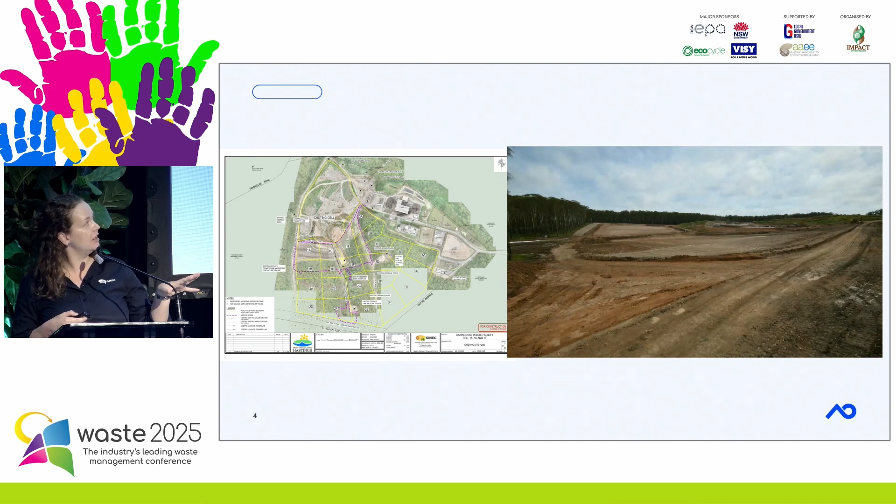It's a snazzy time lapse of the whole thing being constructed, and that's something else that we would definitely recommend for these construction projects. It's just a proprietary product. We don't sell it, but we have lots of clients that use them. It takes a photo every 10 minutes, and you can tell the contractors that it's so you can make a pretty time lapse for your presentations, but honestly it's just useful to be able to keep an eye on what's going on every day. And we were able to monitor our construction projects all across the country somewhat remotely. So yeah, you can see Cairncross being constructed there.

You'll be coming across, there's a lovely flyover at the end that shows the stormwater separation bunds, which are there to minimise leachate generation.

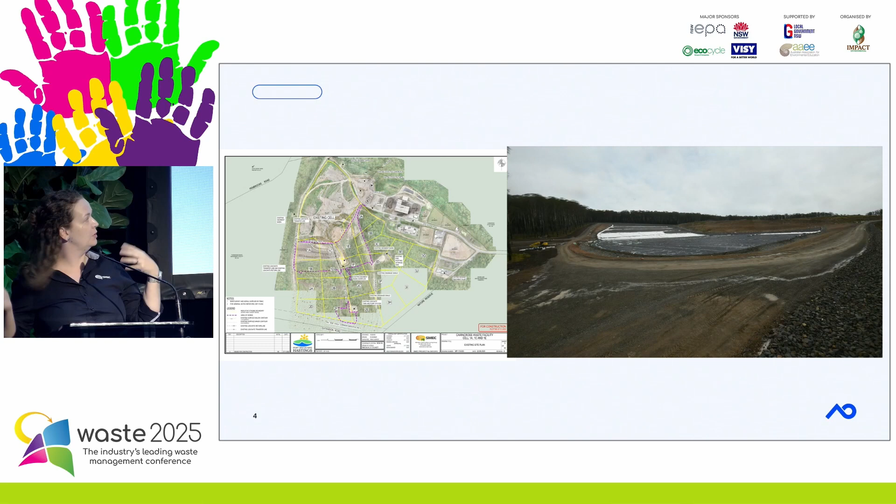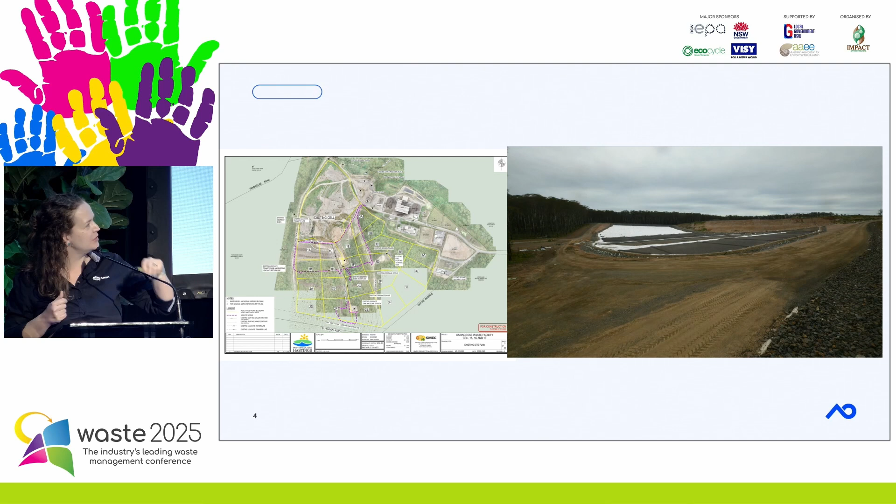So I'm going to jump ahead. We don't need to watch all of Cairncross being built. Go watch it, it's on my LinkedIn. You can see the stormwater separation bunds. We're very proud of that one. Oh, there they were. Terrific. All right. On to closure.

Water flows downhill. Water management is a key principle of landfills. Everyone likes to think landfills are about garbage, or sometimes my geotechnical colleagues tell me they're geotechnical problems. The majority of the significant issues that we see at landfills are water-based. A quick primer, we've got a broad church in the room, as we always do in landfill presentations.

We have 3 water streams. We have leachate, which is dirty garbage juice, water that's touched waste. We have sediment-laden water, which is water that's run off day cover, so it's picked up sediment soils, looks like a chocolate milkshake. And you have clean water, which is storm water, which is run off the grass.

When you're planning your site, obviously you've got high sides, you've got low sides. I spent 5 years at university to be appropriately qualified to tell you that water will flow downhill. You need space at the bottom of the hill for your leachate and sediment dams. Obviously you understand the operations of your site. Of the 3 water streams, sediment is the most relevant to capping. We'll go there in a second, but I left myself a note.

I'm not talking about leachate today, but the other question that everyone comes to ask me is, is my leachate pond big enough? And I will say, it depends. How much leachate do you make? And then you will say, I don't know. So it's tricky. Go get some flow monitoring. That helps everybody. Back to capping.

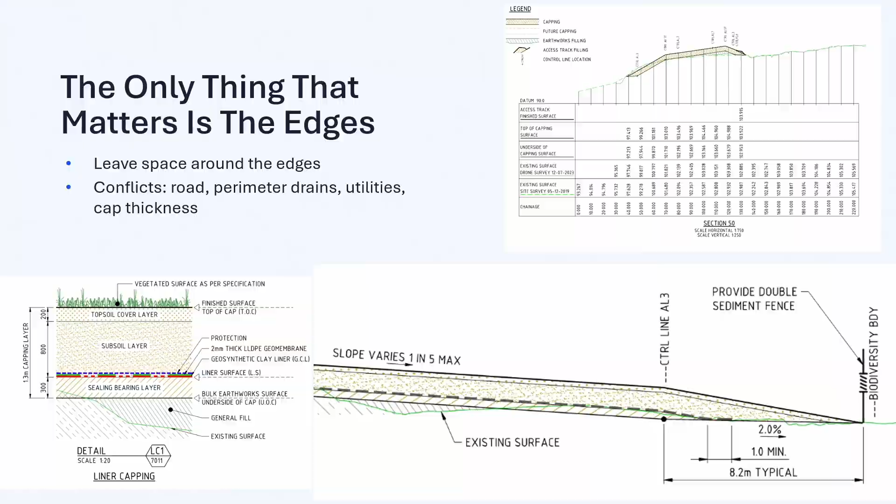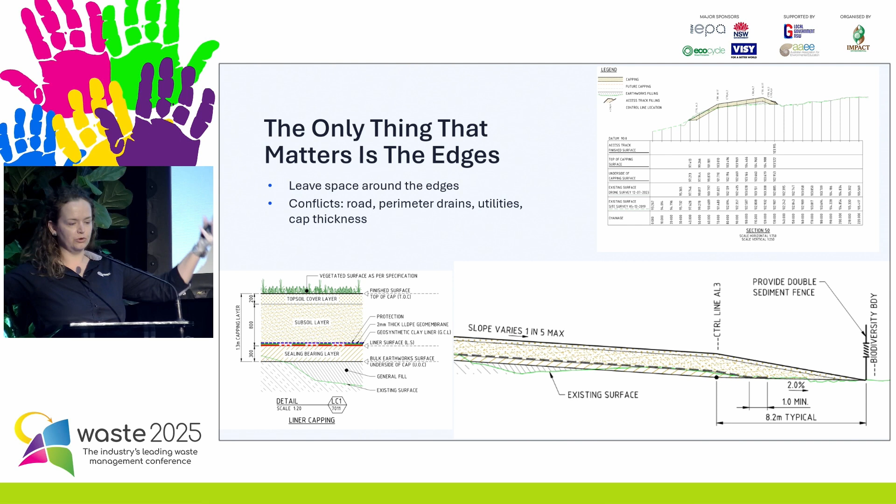So this detail, there we go, is a standard cap, 2016 cap with geosynthetics. That's New South Wales terminology that's sort of similar all across the world and Australia. That detail there is like 90% of the work, right? Put down some dirt, put down some low permeability, more dirt, more grass, off you go.

The trick is what happens at the edges. The edges are constrained, so we need to think about your fence. We need to think about where your property boundaries are. We need to squeeze in access tracks around the outside for monitoring and other uses. And we need to think about the drainage infrastructure, the open swales that we were discussing before for our water, which is flowing downhill. The cap also takes some room.

So over here you can see the problem is we actually folded that guy down because we ran out of room. But the cap itself takes some room at the edge. So the key message is here that your waste can really only go to there. So if you're placing waste, don't put it all the way to the fence, okay? Give yourself a margin at the edge.

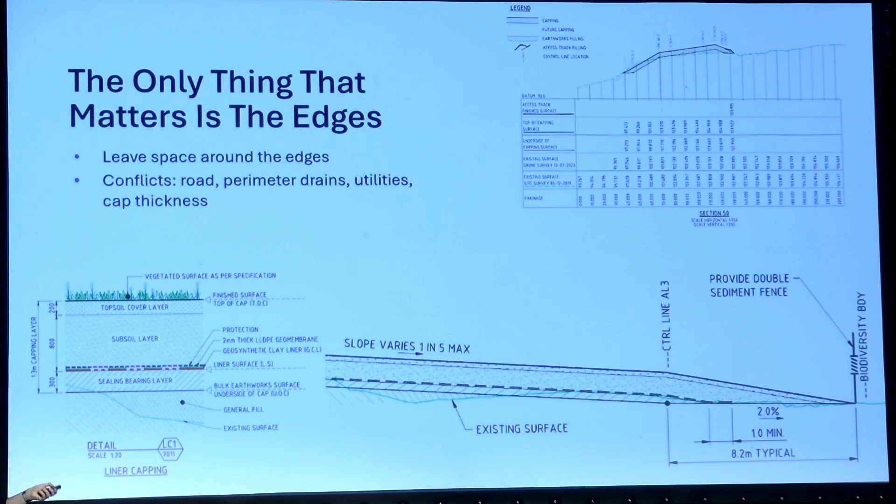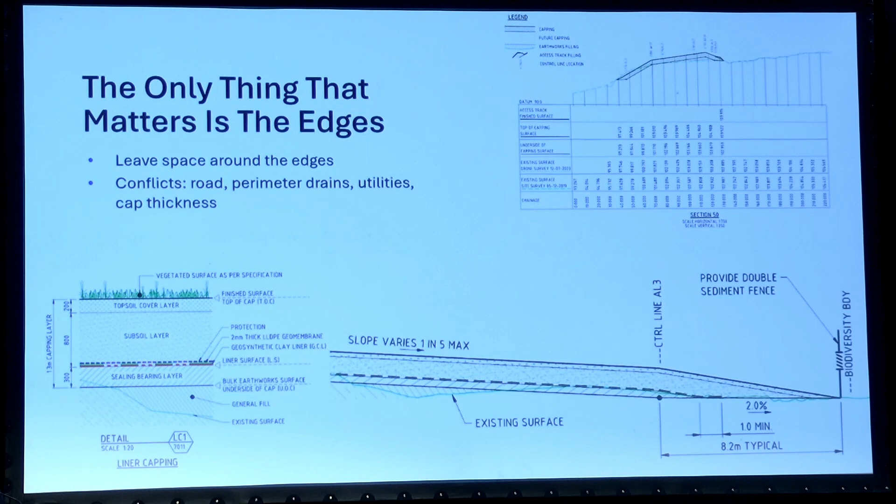Space makes everything easier. If you're tight to the edges, get a proper cadastral survey. Most surveys don't include a full boundary definition. It's a little bit more expensive than a normal one, not anything outrageous, but it's just more than normal. It's not normally needed.

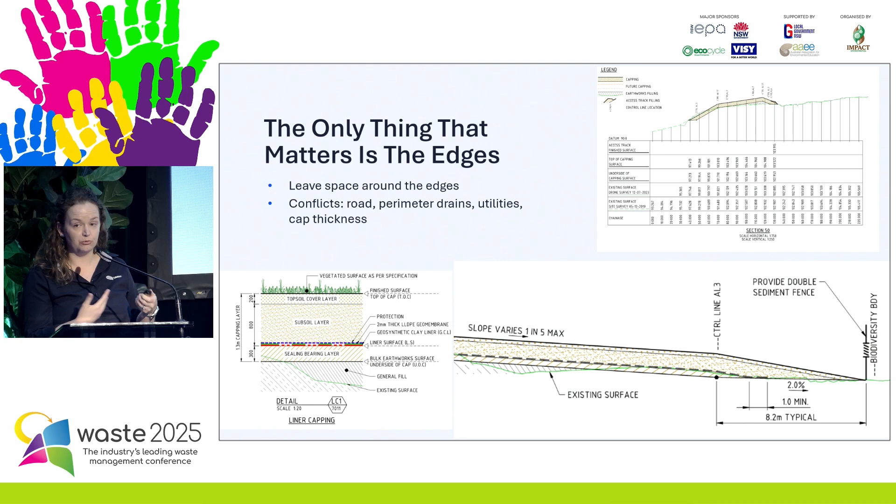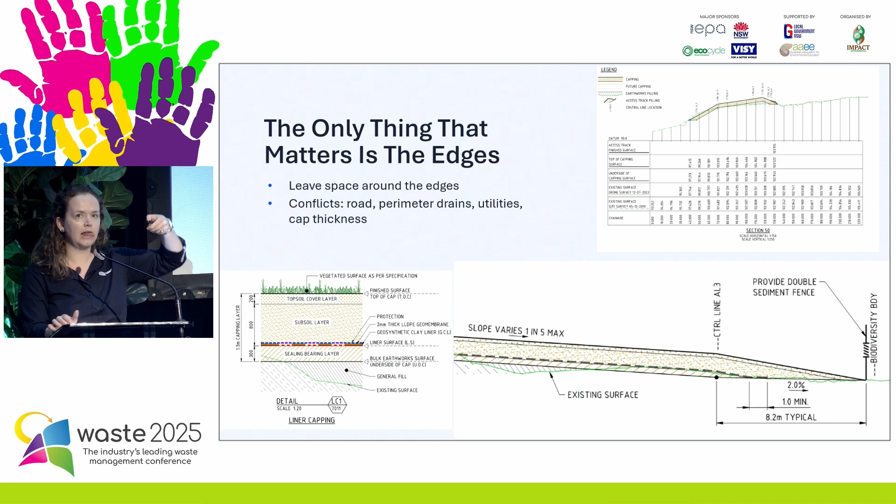The database extracts, I would say, are normally within 1 or 2 metres accurate, but I've seen some rural ones that are up to 7 metres out. So if you're getting jammed at the edges, you're doing work at the edges, work out where your edges are. Clear definition of the edges helps. All right. I pointed to the right spot.

Don't set your landfill on fire. So I know we've been discussing this elsewhere on batteries. This is about rural fire. A lot of our landfills are surrounded by beautiful native bushland. These guidelines are from the New South Wales Fire. I'm sure you can steal them for any state you like. They provide some really simple, useful guidelines for what they're looking for.

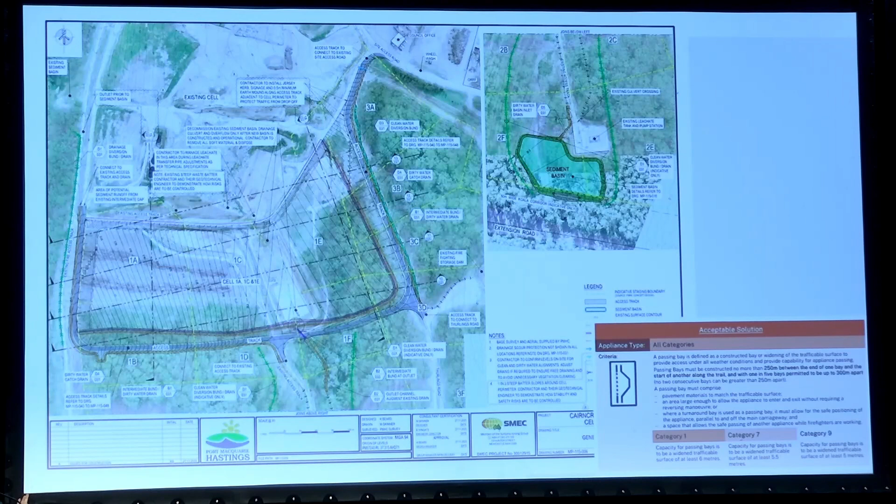So it was baked into the consents for Cairncross. It was required, but having seen it and how easy it is to do, I would recommend it to everybody. Let's keep our rural fire service volunteers safe. It means on a single lane access that they're able to turn around and escape in a worst case situation.

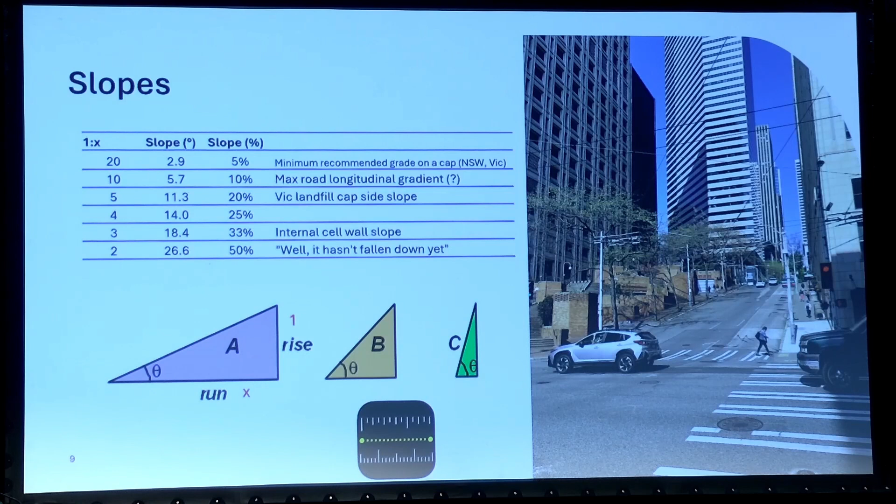The key message on slopes is, we need to worry about our edges and we need to worry about our slopes. We're talking here about various examples of slopes that are relevant for landfills. You might all know Victorian landfills officially cap out at 1 in 5, although I know there are plenty which are steeper. There's plenty of 1 in 3s, 1 in 4s in New South Wales where it hasn't been regulated. And I've seen plenty of waste slopes up here in this range. And when I expressed concern, they said, well, it hasn't fallen down yet, which is also a good metric.

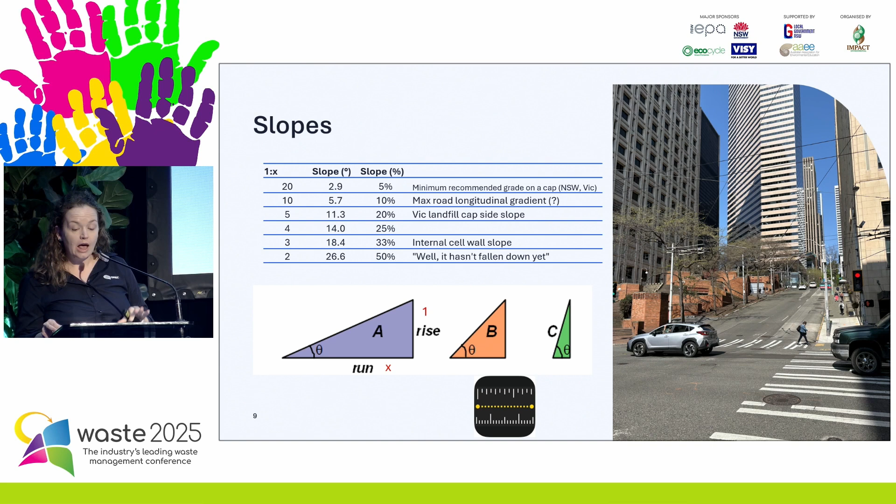Just don't ask me to bless it.

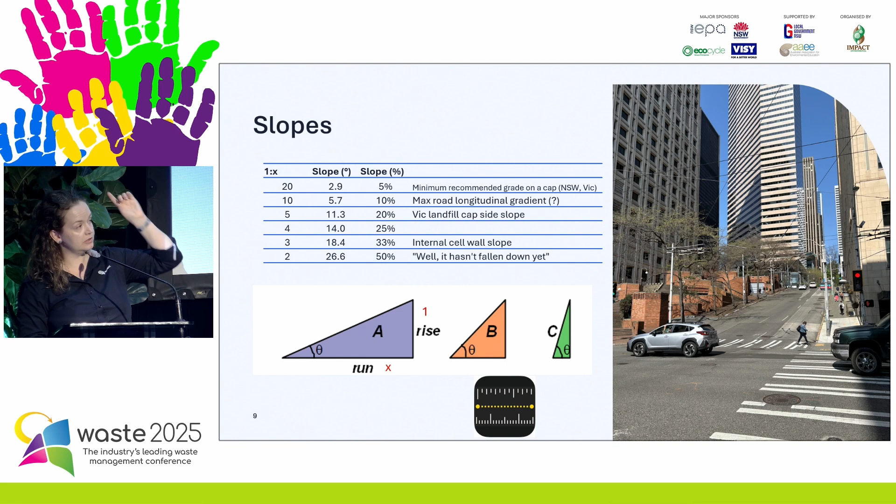Okay, so if you're steeper than 1 in 5 on your edges, that's where we need to start being concerned. So if we're putting in the geosynthetics, they're slipperier than a soil material, which we might have used for capping in the past. And the risk is if you're too steep or you're too slippery, is that your whole cover might slide off and end up next door, which is clearly suboptimal, as my brother would say.

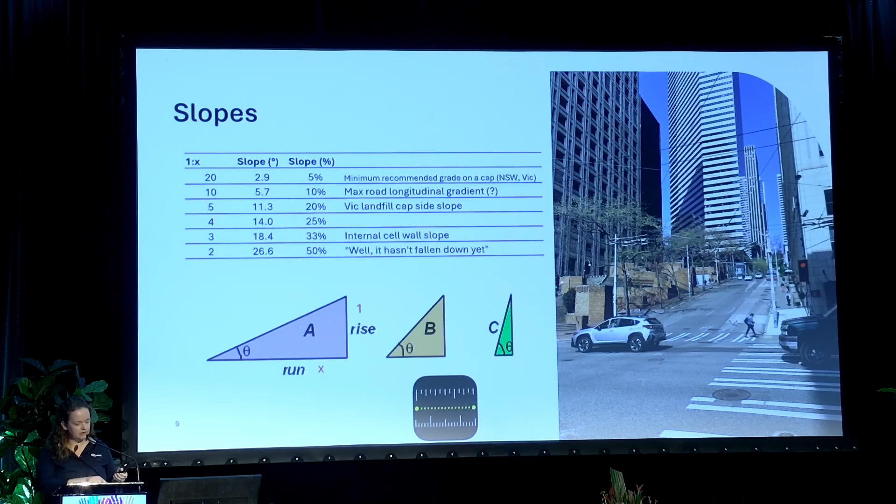If you've got something that's steeper than 1 in 5, it's not impossible. There's more engineering that's required. There's procurement risks and issues, and I can talk you through all of those fun things. Just make sure you plan and give yourself some time.

Utilities, in-ground and overhead. Where are your utilities? You don't know? You're in good company. Nobody ever does. We've hit more utilities than I care to admit in the investigation works we've done at landfills. If you can spend some time working it out or working out your best guess on what is in the ground anywhere where there might be earthworks or where we might be doing geotechnical investigations, it just saves a whole bunch of headache for everyone.

Obviously, you can use a service locator, you can access your own site operator knowledge. Often the operators have been there for a really long time. You can use a surveyor to put it on a map. Councils should have access to a GIS department. I've always been amazed that councils seem to do water and sewer and stop there. You should be able to get your GIS department to do it.

If not, surveyor, and if you want to do it yourself, I'll give a shout out for QGIS, which is open source software. You can find your nearest computer-inclined millennial and get them to map it for you. We use that product a lot as well, supporting our remote clients, sending us photos, locating them. The use of technology is really supporting us.

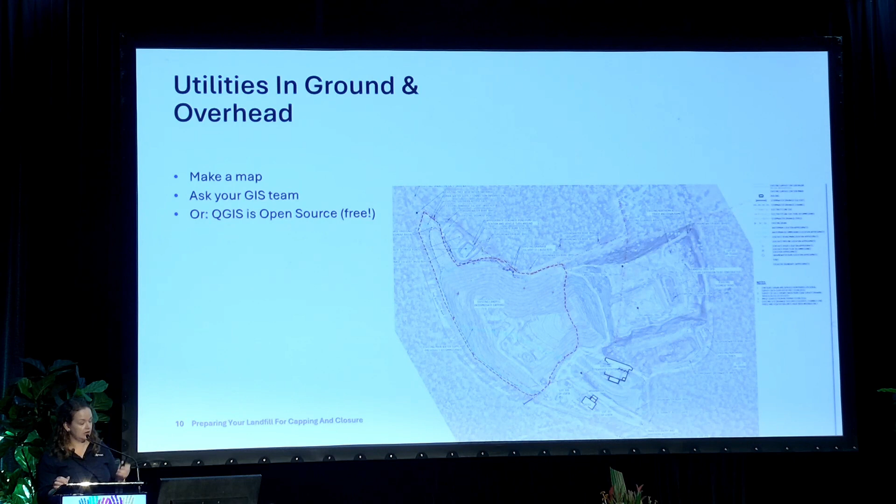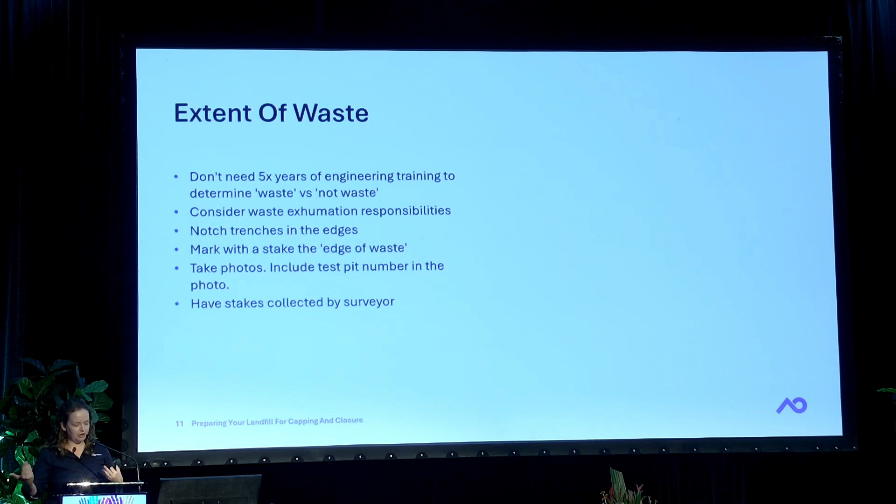I'm going to reel along. Extent of waste. How much area do I need to cap? Some sites are really well planned, and that's known. A lot of our historic sites in New South Wales are a little bit higgledy-piggledy. On day one, I want you to tell me the edges of where you need this cap to go. We can do extent of waste investigations, but you don't need an engineering degree to dig a hole and to determine if it's waste or not waste. It's certainly something you can do yourself.

We would suggest notching the side at 20 to 50 metre spacing, mark a stake, extent of waste, write the test pit number, take a photo, so we've got some records, have the stakes collected by a surveyor, put it on your plan. See, you don't need me. Oh, and be cognisant of your waste exhumation obligations. Some of our clients are concerned about waste exhumation and that you might need a permit. Don't forget that one.

So that's the earthworks that had to be done at this site to make it regular enough to be able to line it. People like to imagine that I can take that up into 300 mils underneath the geosynthetics, and it never quite works out that way. So be aware that that's required. Again, waste exhumation obligations. Sometimes we prepare waste exhumation management plans just to step through the OH&S side of those. Or, even better, save yourself all this trouble and just fill to the right profile to start with. So if you've got top of waste contours and fill to those, it saves you a whole lot of problems.

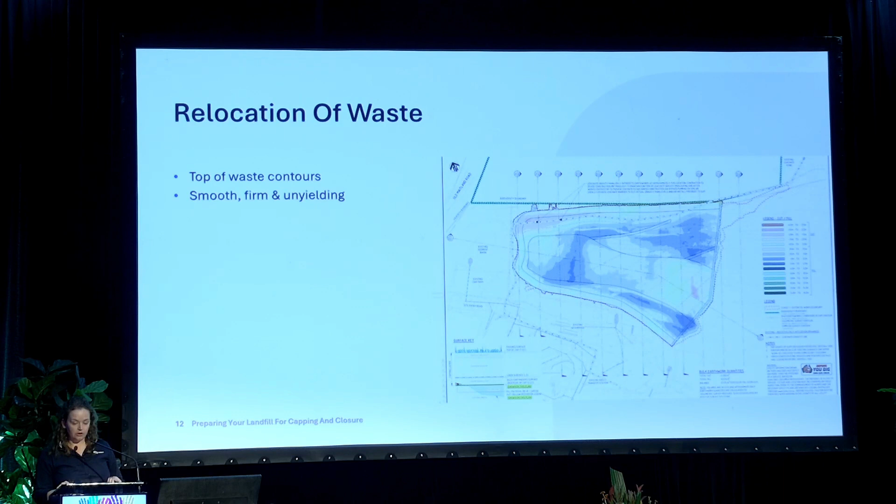Hopefully you've left with a better understanding of the steps we go through to achieve capping and closure.